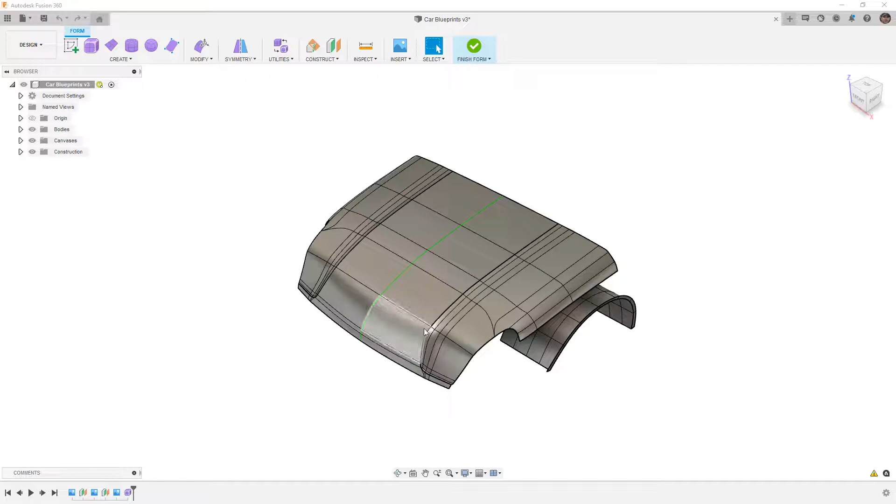In this video, we're going to carry on with what we've done previously, where we added a creased ridgeline as opposed to using two edges close together. We're carrying this over to the point where we now have to flare the fender out, and carry the front edge of the hood over so we can connect to our wheel arches.

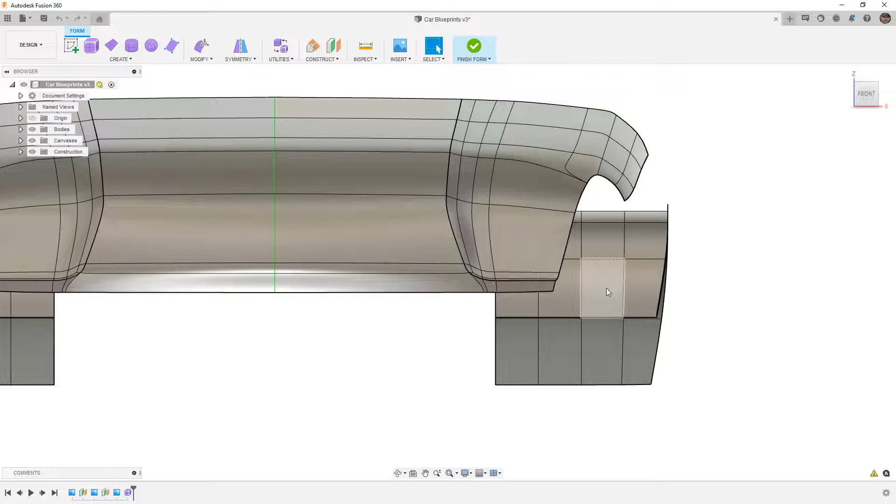There's no right or wrong way to go about this process in terms of which direction to go first. Since in the last video we created our wheel arches and started extruding the top edge of the fender, in this video I'm going to start from the front edge and continue moving that over. If you'll remember, we did identify a few problem areas.

There are things we need to fix, but for right now we're not too worried about these areas. Sometimes we can fix these by selecting an edge, deleting it so it's able to smooth itself out, then coming back and inserting an edge, or using an insert point. For example, going from here to the midpoint of this edge, sometimes that will fix the geometry. We can go back and select insert point, and sometimes we can make triangles or extend those patches out.

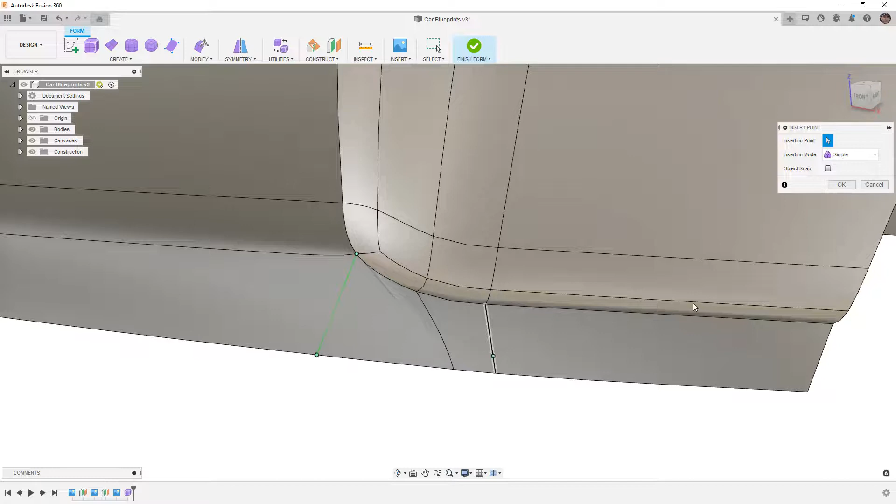But again, this is an area we're going to have to focus on. We know we're going to have to come back and make some changes, so we're not going to spend a lot of time on it right now. Those details can really eat up a lot of time, and it's probably better to continue making bigger strides and then come back to those smaller details.

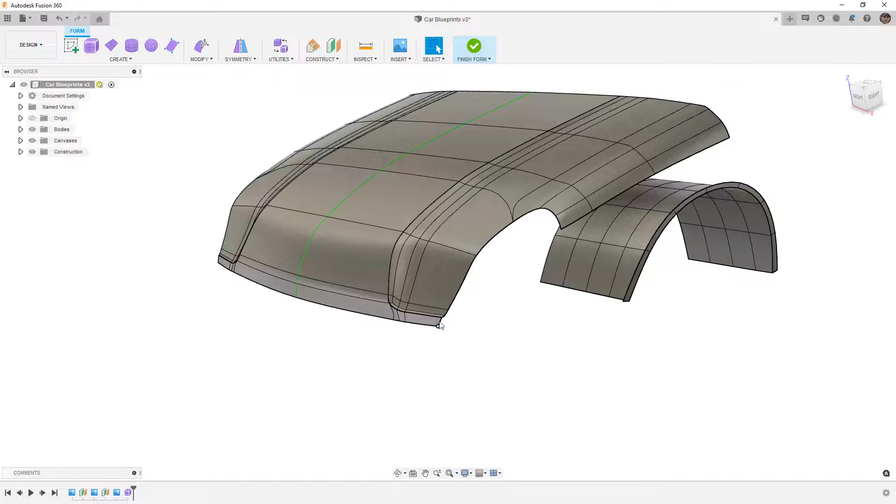So the next thing I'm going to do is carry this fender detail over and connect it to the wheel arch. When we do this, note that we have a creased edge here, and I want to select a couple of edges. I'm going to grab these three edges, doing this from the front view to start.

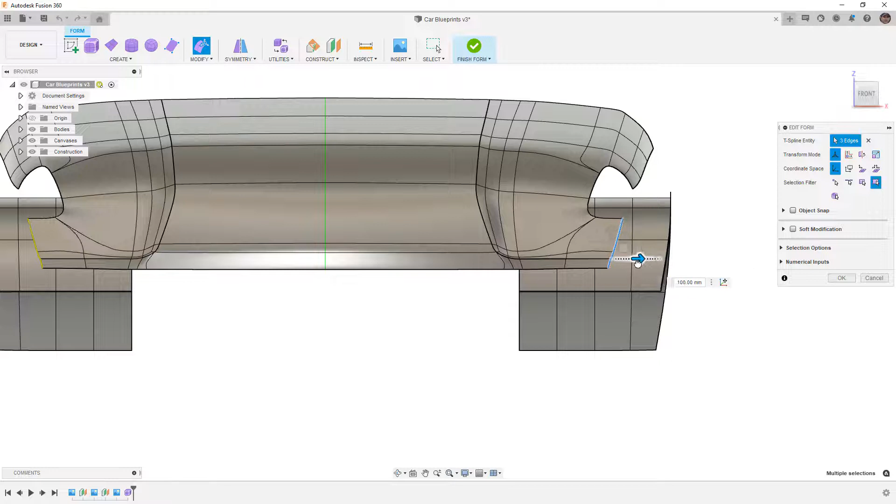We're going to go to Modify, Edit Form, the tool we've been using for pretty much everything. We'll hold down Alt on the keyboard to extrude, and begin pulling this out. Notice that as soon as we do this, we're seeing very different geometry being created. When it extrudes, it really brought this edge quite farther out than we wanted.

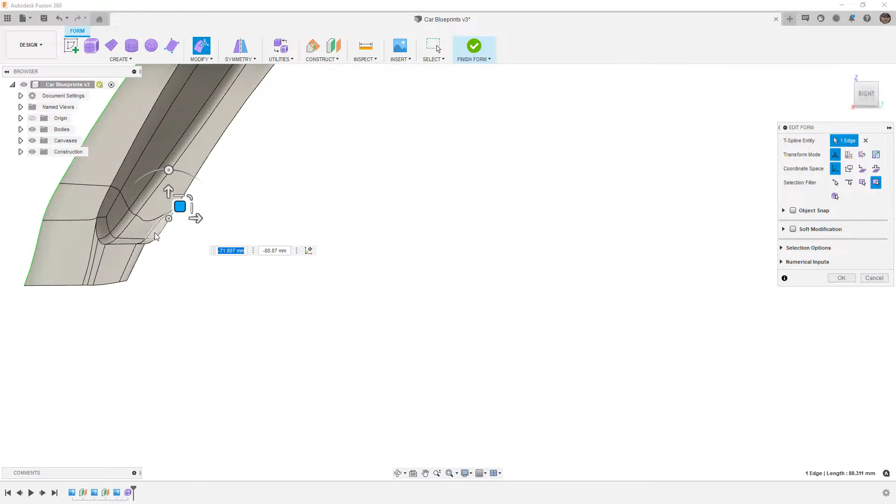So what I'm going to do is reshape this a little bit. I'll grab that face and bring it down, keeping in mind we're going to make some more drastic changes. At this point, let's go to a box display so we have a better idea of what's underneath.

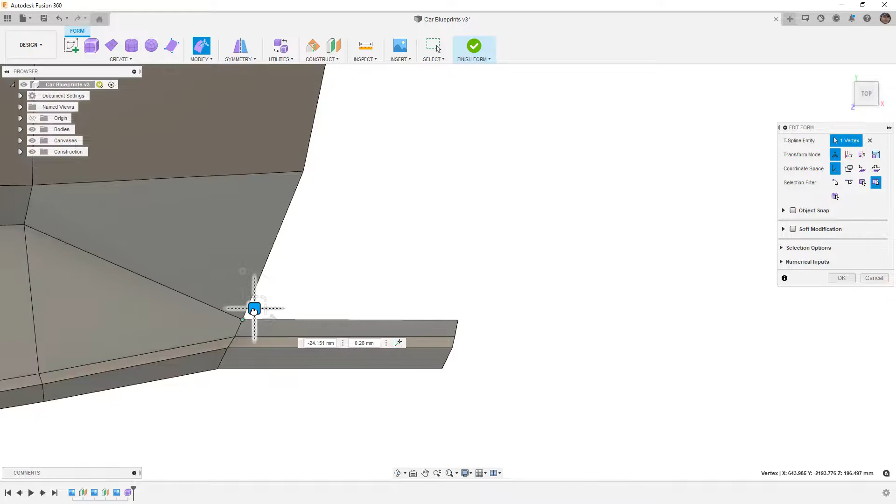Back in the front view, we want to make sure we pull everything and get it roughly in line. We don't want to deal with bad geometry, so everything needs to be nice and even. I'm going to take this edge and pull it back a little bit, and probably take this vertex and pull it back too. Now that we have those lined up, looking at this from the front...

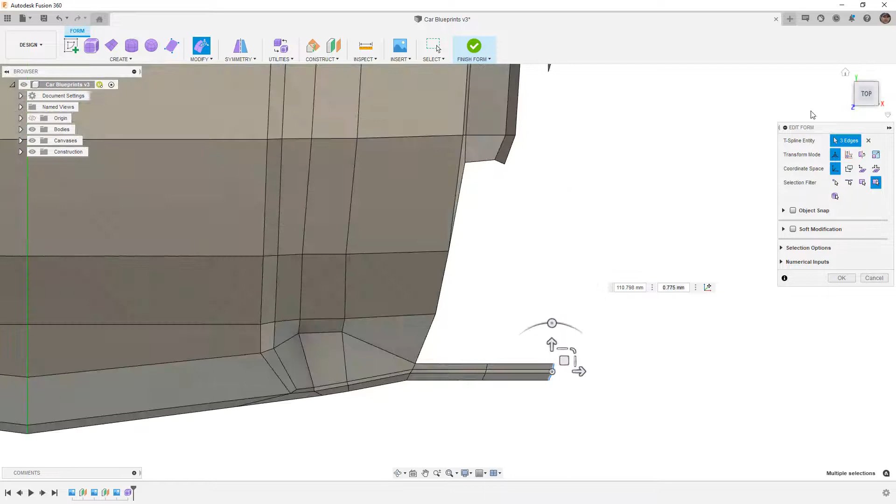This looks pretty good, we're going straight across, and now I want to extrude it again. I'm going to do a box select to grab those edges, hold down Alt, and begin bringing it back. But this time, before deselecting, I want to go to a top view and rotate them, pulling them back. If we go to a smooth display, what we're doing is trying to transition this shape back.

I'm going to box select this, grab these edges, and pull them back a little bit, and maybe rotate them just a little bit more.

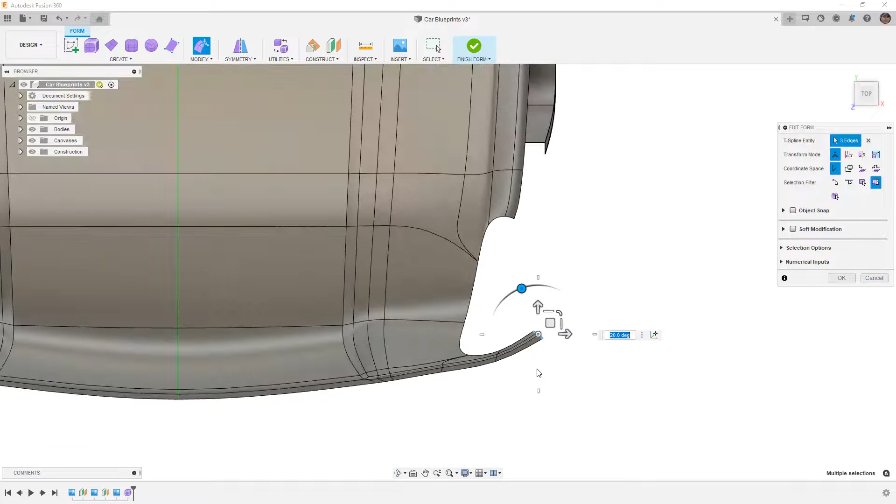We're looking to carry that creased edge around, and again, we can spend a lot of time adjusting the shape, but we are going to have to cut some stuff out for the headlight, so we're not going to spend too much time finalizing it just yet.

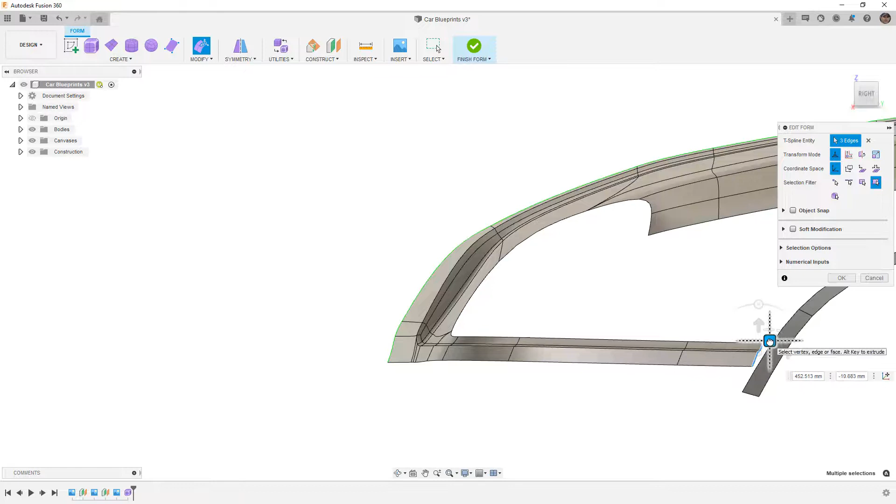But we do want to grab those edges again, this time from the right. Holding down the Alt key, we're going to bring that back. And as we get a little bit closer, I'm going to let go of the Alt key. I'm going to do one final pull to about right there, and then I'm going to left click.

Next, I'm going to grab these edges on the bottom. And again, top left to bottom right, we'll be able to grab just the edges in that box. And I'm going to bring this up a little bit closer.

This transition is going to be tricky because we have a creased edge here. That creased edge is going to be problematic, and we need to decide how we would terminate that into the rest of the geometry.

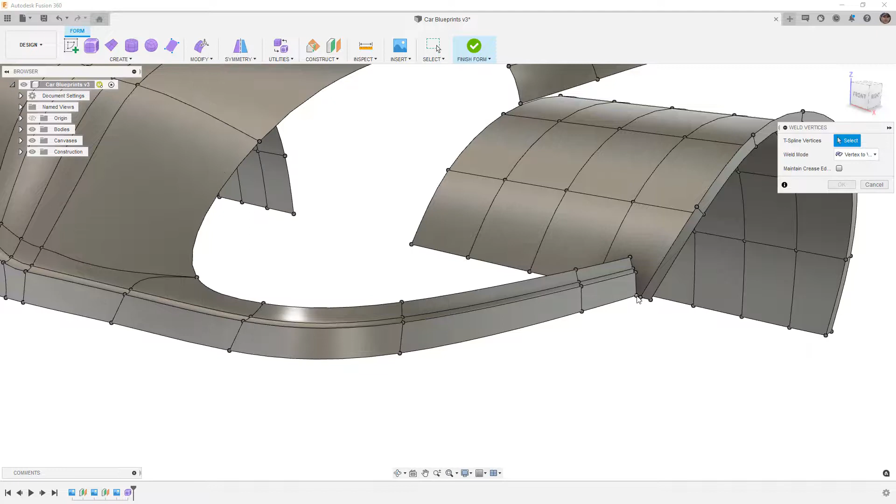So my first attempt here is to go to Modify, and I want to use Weld Vertices. I'm going to weld these two vertices here. As soon as I do that, notice that everything goes into box display. Now, oftentimes when we get a box display like this, it generally means that there's a problem and we can't go back to smooth display. And that's because we've got this open edge here. We've got one vertex and it's been welded to another, but this edge is just open and it doesn't know how to reconcile that in smooth display.

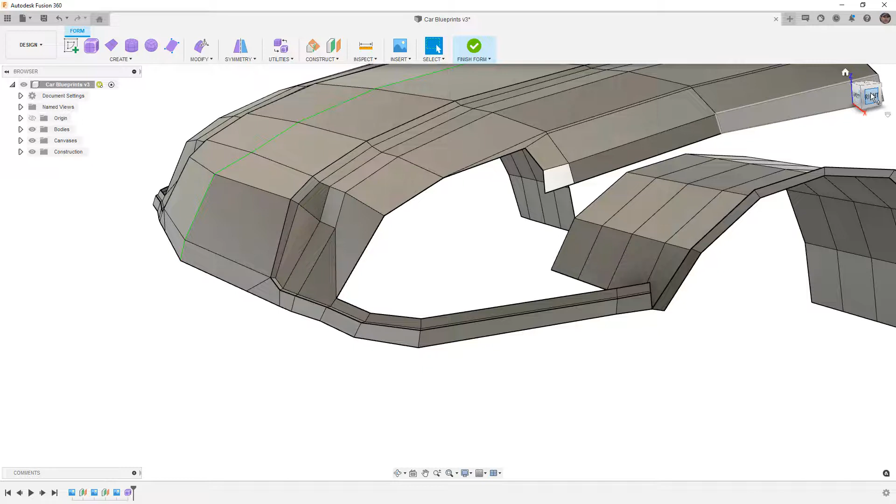So in order for us to really get that to work, we need to transition the shape into the rest of the geometry. In order to do that, I'm going to try a few things. I'm going to begin by selecting these edges, and I'm going to start by pulling them up. Now, by pulling them up, what I'm doing is I'm getting this edge and this edge roughly the same length, and then we're going to see what that transition does when we go back to smooth display.

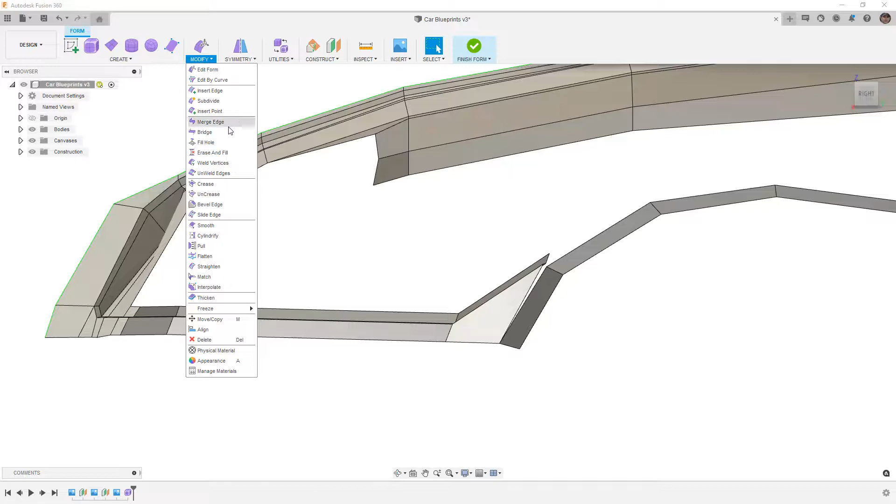So we'll go to Modify. This time we'll take a look at merging the edge. So I'm going to take this as my first edge, and this is my second edge, and I'm going to say OK and put those together. Now you can see we're back in smooth display. It's showing that crease, that transition going up. And you can see here that this section, which was basically the top level of that, is now transitioning.

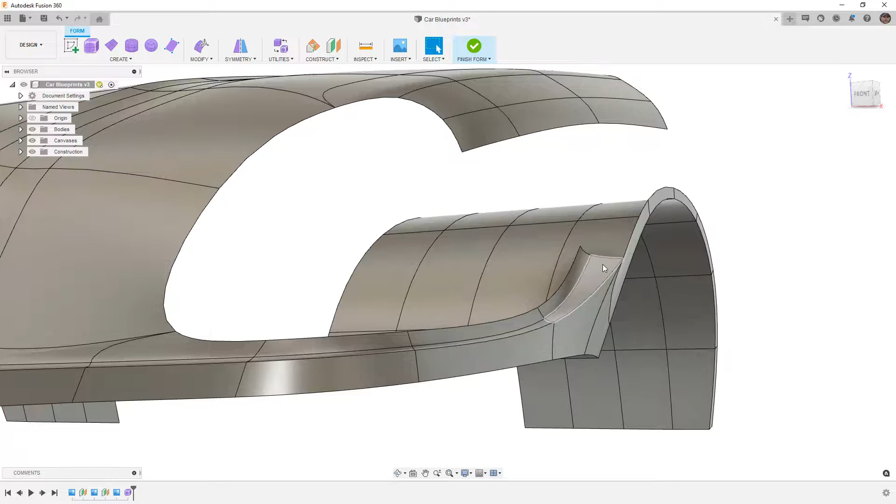I'm going to go back to a box display, and I want to take this edge from a front view, and I actually want to bring it up and over. The reason I want to bring it up and over is because I'm taking this crease up and I want it to blend and sort of fade away. So I want to bring this up and get it a little bit closer, go back to a smooth display, and let's just see what it looks like.

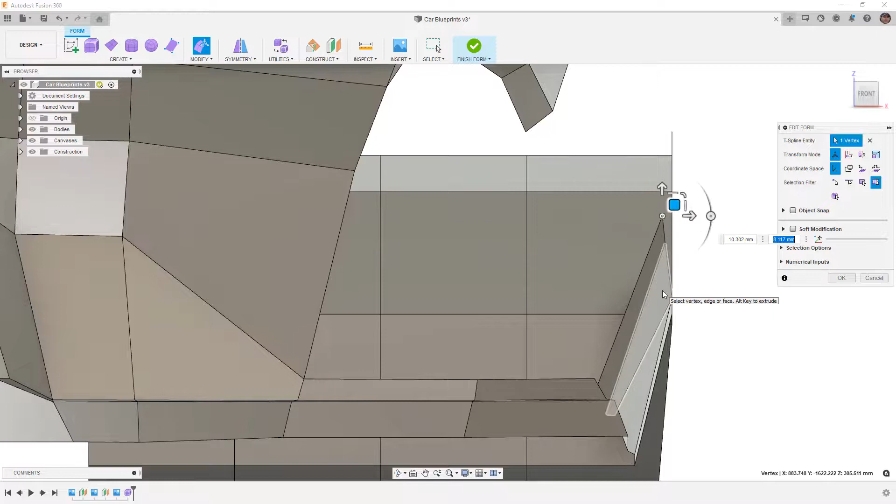So that looks pretty good. And if I use Control and 4 on the keyboard, don't pay too much attention to this crease or transition here because we don't have any other geometry. But that transition, how it goes up the fender, actually looks pretty good.

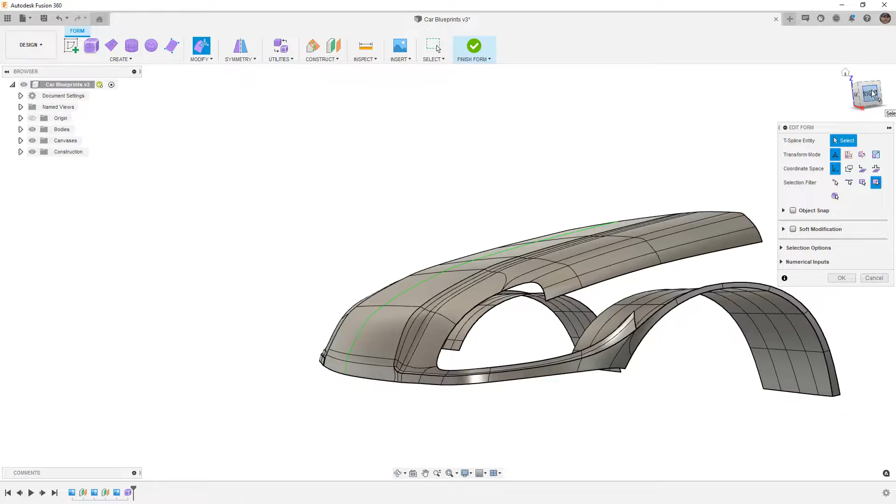Again, there's a lot of detail work that we can do. We need to determine in the real car how that transition actually works. And in reality, what happens is that transition happens a lot lower. So what that means is we're going to have to make some adjustments to the shape of the fender.

And the reason I did that box select for that is because we actually have the entire line of vertices behind it. And because we're dealing with symmetry, box selecting here would grab the ones on the other side of the car, but that's not really a problem because they're going to move anyways.

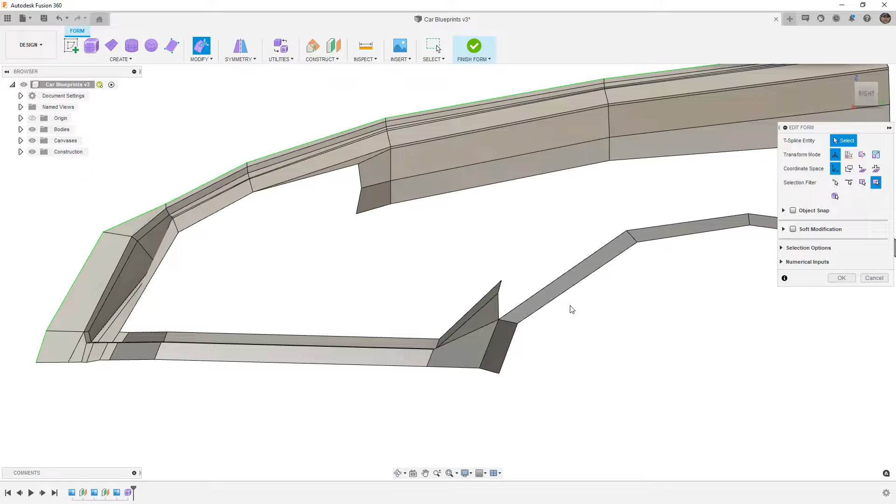But moving that down means that we likely need to add another cut or another edge in here. So we're going to go to Modify, Insert Point. I'm going to go from the back mid to the front, and then I'm going to come up to this edge here and say OK.

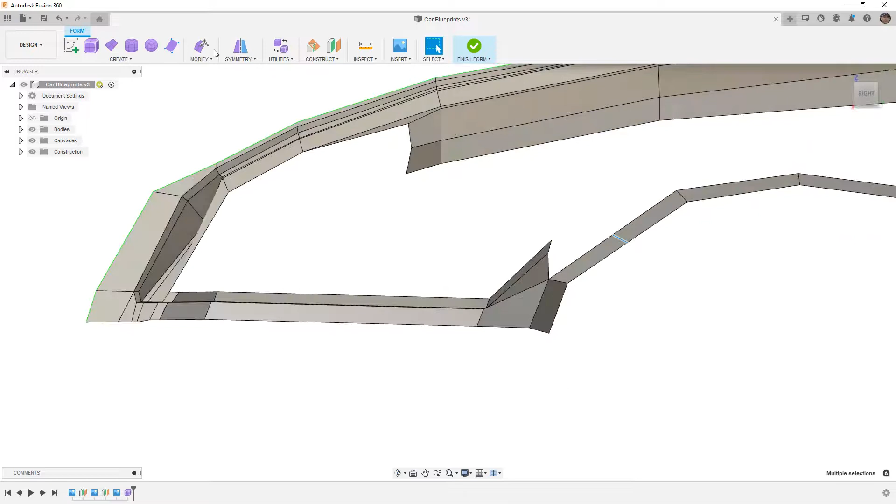And then I'm going to box select that, go to my right view. I'm going to go Modify, Edit Form, and I'm just going to add a little bit of an arc there. So again, smooth transition, and you can see how everything sort of works out. So now we have a little bit more freedom to move this around.

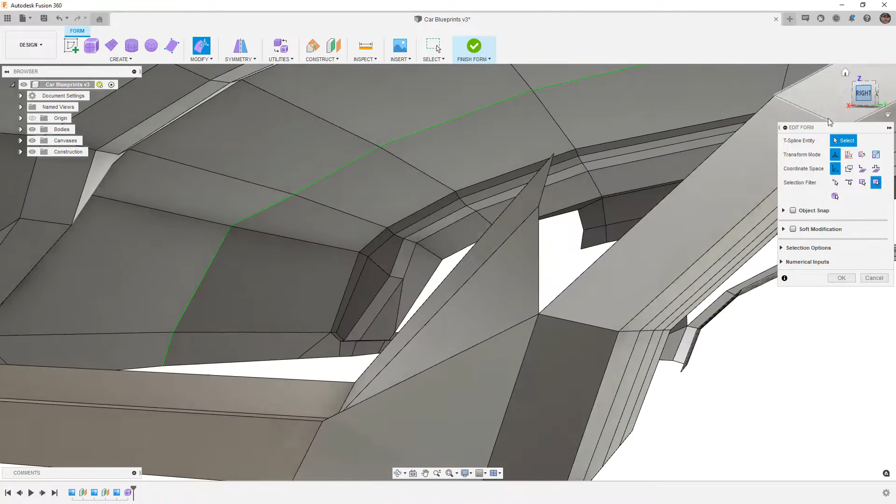We can move that entire edge down if we want to. And again, we need to be mindful of what we're selecting. So box select, pull this down a little bit, and then let's take a look at these transitions.

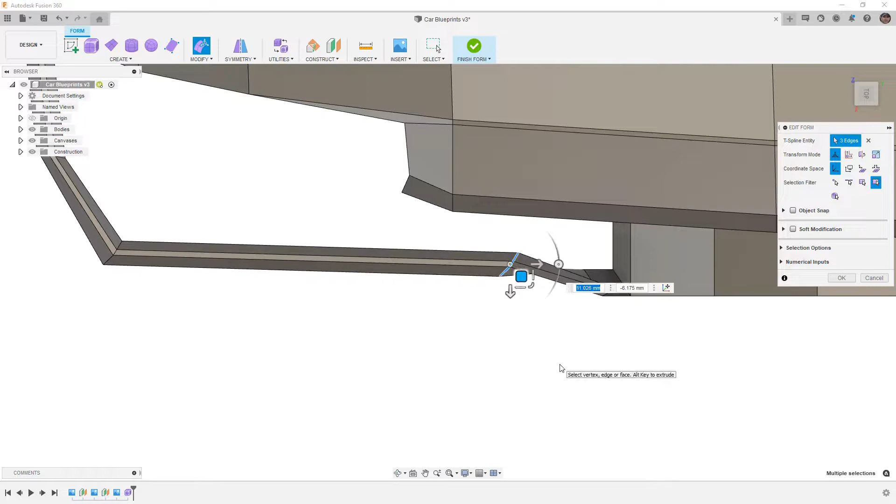Everything here looks okay. Keep in mind that when you have these sort of transitions, they do tend to flare out. So having that flare out is okay, but we might want to move this out a little bit. Check it out in a smooth display. You might want to add another section of edges in here if we want it to go straight back and then flare out. But it's looking okay.

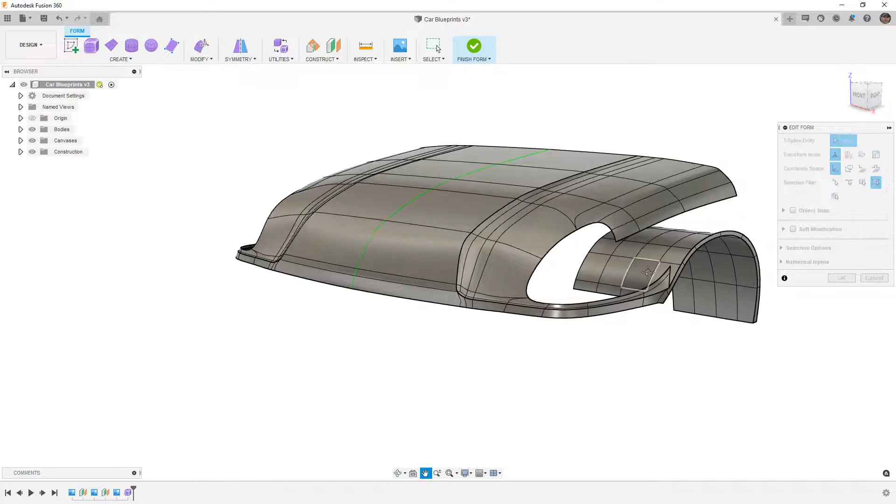We could do more with this, but we could also kind of leave it as is until we get more detail. It's always important to remember that as soon as we add more detail, as we begin adding more edges and more features, it's going to change some of this underlying geometry. So spending a lot of time now getting all of these tiny little details perfect is going to be a waste of effort. It's really something that you need to get the shape close, and then we can begin subdividing it and adding more edges and getting the shape a lot closer.

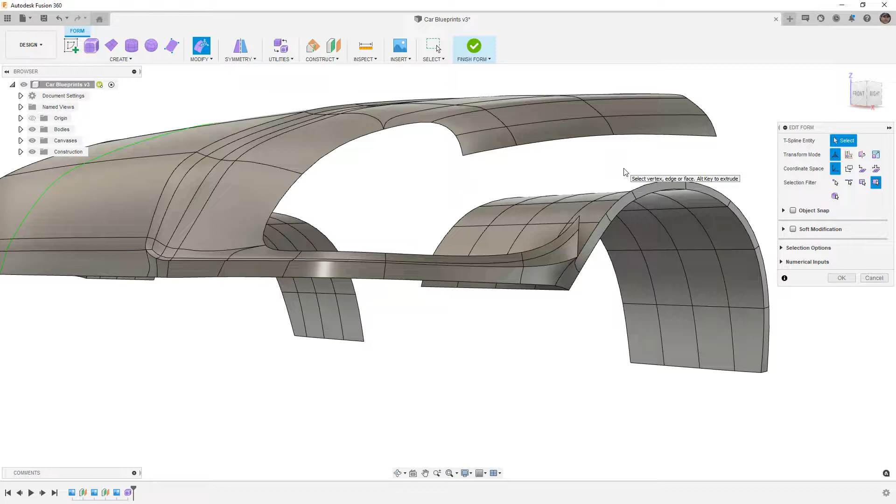When we take a look at the car, these transitions are usually going to be the hardest. They're going to be very difficult because we're transitioning from a creased edge and we're blending it into something smooth, and those creases tend to disappear. In reality, we would love to say this is 100% crease, this is 0%, and just have it fade away on that edge. And that's unfortunately not possible using these tools.

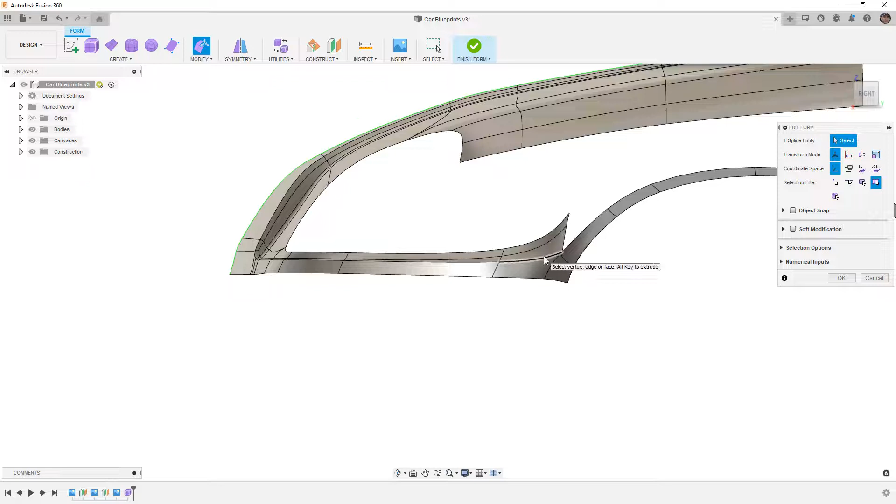We have to really force the issue manually. I'm going to go back to a box display, and I'm going to make some adjustments here. I want to pull this back a little bit, and I have to decide what to do with this.

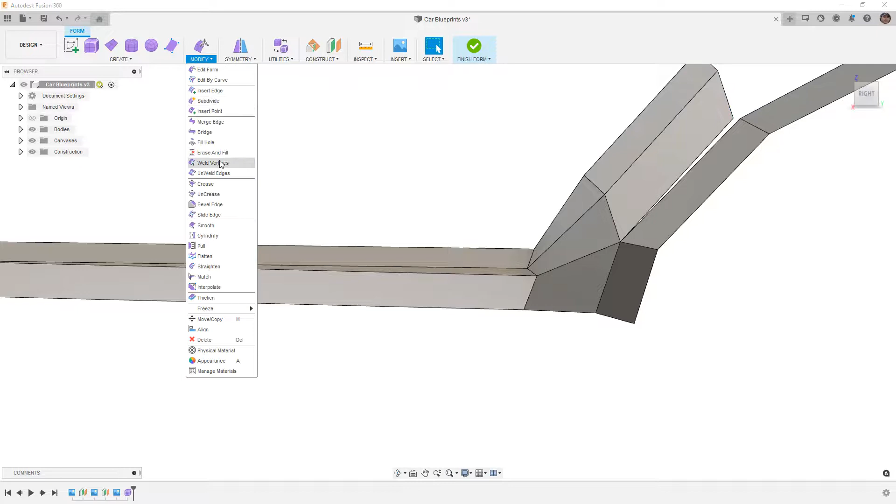Do I want to continue to sort of make extrusions off of this edge and blend them in, or do I want to try to merge some edges? I think in this case, I'm going to select these edges, use Alt, and extrude them out. Then I'm going to say OK, go to Modify, Weld Vertices, and bring these two together.

Then I'm going to take a look at it in Smooth Display. So in Smooth Display, that obviously doesn't look like the real car, that hard edge transitioning up. But again, until we add more geometry, we don't really know what's going to happen.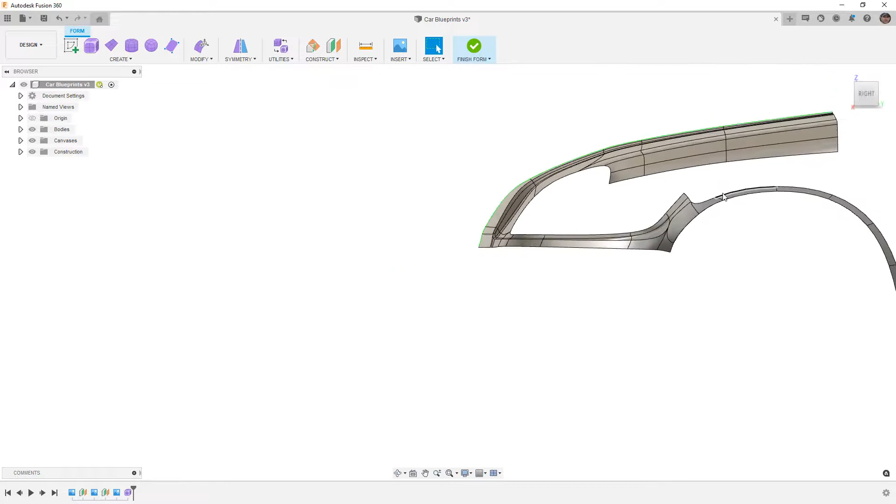And this is the point on the car where we have that sort of boxed fender flare. So if we bring back our canvases and we bring back our side view, this is where we need to decide how the geometry is going to take shape. So I'm going to start at the back edge here.

I'm going to begin at these two faces, or these two edges, I should say. And I'm going to bring them back, extruding them using Alt, and then I'm going to modify their position. This is something that we can do in Smooth Display or we can do in Box Display. It really depends on your workflow.

Then I'm going to take these two edges at the top and extrude them up. And once again, I'm going to grab a vertex, pull that up, grab this one, pull it up. Now we sort of have created this area here.

Now, if we want to continue this, we can continue extruding these out, and then we need to begin to decide, well, are we making triangular patches anywhere, or are we going to pull these two together? And what is that shape really going to look like?

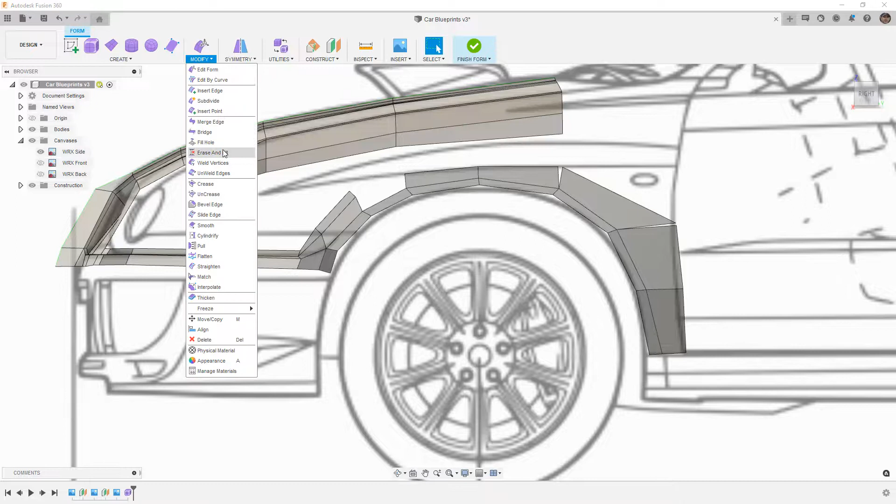Remember, at this point, we want to be careful not to add too much detail. So we're going to weld these vertices together. I'm going to select these two, weld them together, and select these two and weld them together. Then I'm going to take a look at the Smooth Display.

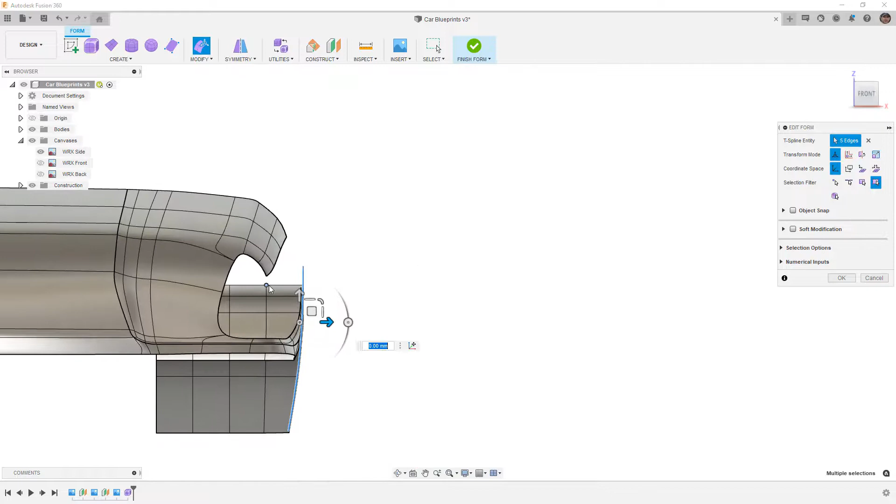So that looks okay, pretty smooth transition. We can pull it in if we want some curvature, using Modify. I'm going to go to a front view so I can see the curvature, and pull that in slightly. So you can see we've got a slight rounding here.

That's typically what you'd see coming away from a fender opening. Next, we can begin to connect - you'll notice we've got two edges here and one, and we want to try to keep these four-sided patches whenever possible. In this case, I'm going to use my bridge tool, going from this edge to this edge. I'm going to say one face because that's how many we have in between.

I can show a preview if I want - it's not really going to do much for me. But what it's done is created that extrude for us going between those two edges. So now if we go back to Smooth Display, we can see what we're creating, what's starting to happen here.

But when we view it from the right, this is where that flare is, that box flare. So I think this is going to end up being a triangle. I don't know that I can make it a four-sided patch. We can certainly try, but we need to get this flared out section.

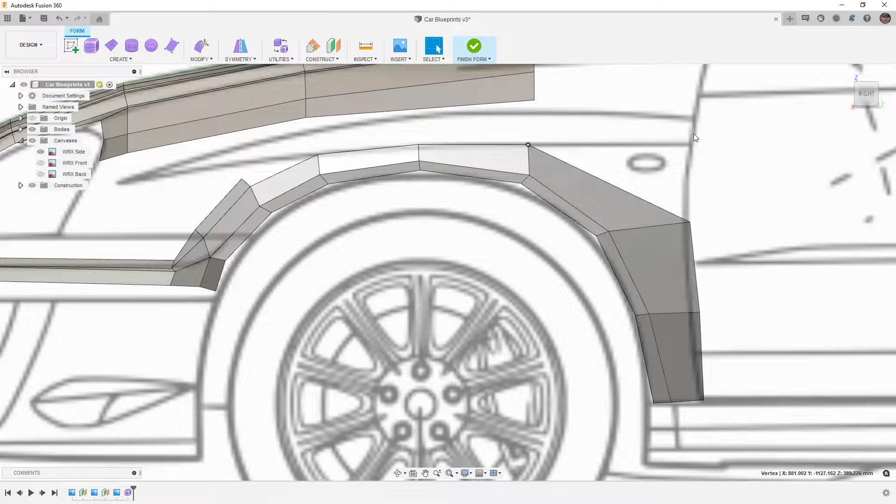In order to do that, once again I'm going to extrude. I'm going to hold down the Alt key, bring this up, and say OK. And then I want to continue to use Edit Form, and bring this down, potentially bring this entire edge down, so that it gives me a little more room to have that four-sided patch.

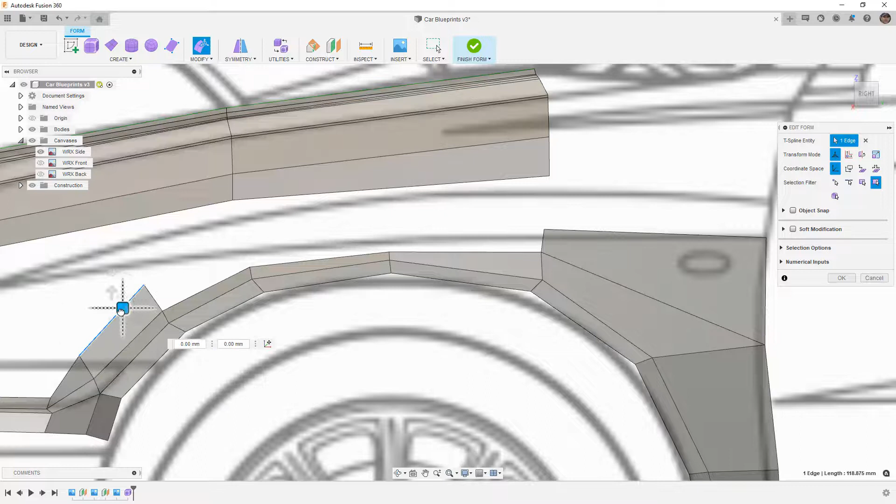Again, keeping everything consistent, moving everything in plane, being careful that we don't move things in 3 dimensions at once. We're only trying to work in either one direction along an axis or in a plane. So I'm going to try to match that, and then continue with these two, making the selection here.

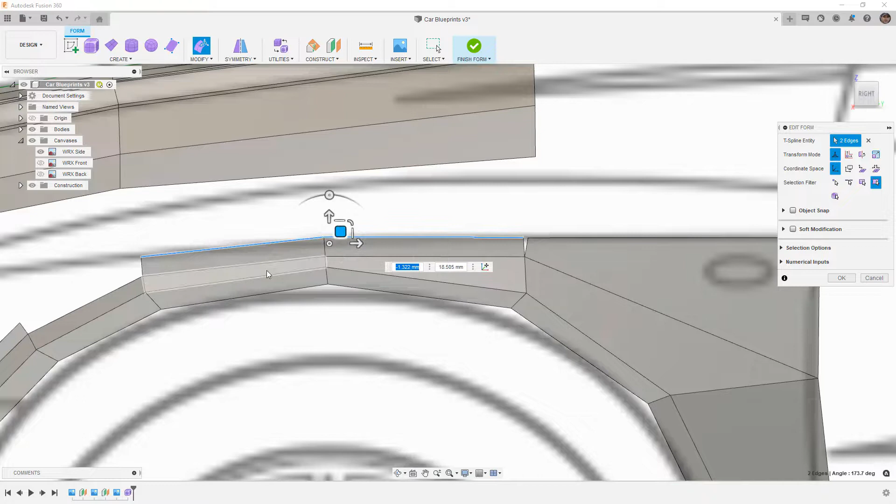Hold down Alt and extrude those up, pulling them slightly away from here because I want to merge it, and I'll say OK here. So let's weld these vertices and say OK. So now we're beginning to build that fender flare. If we take a look at a Smooth Display, it doesn't really look like much yet.

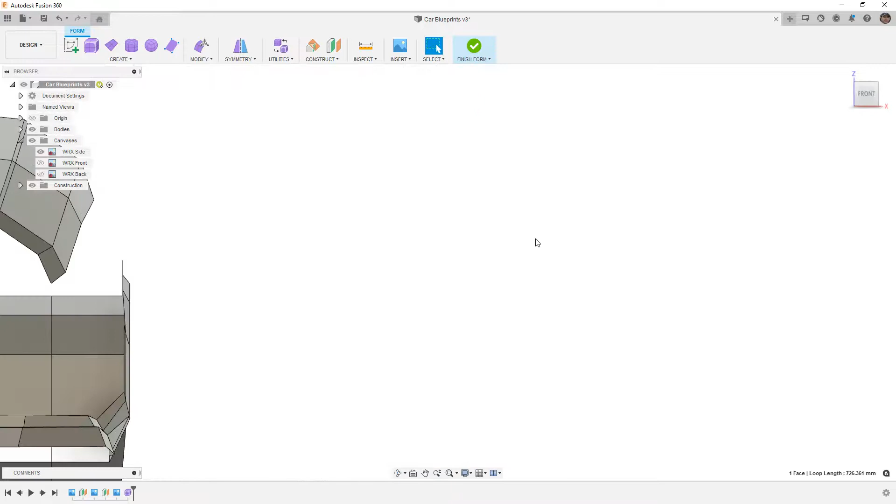But what we're doing is starting to define that upper edge of the flare. So when we look at this from the front and bring back our front image, we need to start coming in and then up and connect to this. Now we can do this in a number of different ways, but continuing to extrude using that Modify Edit Form is probably going to be the best option.

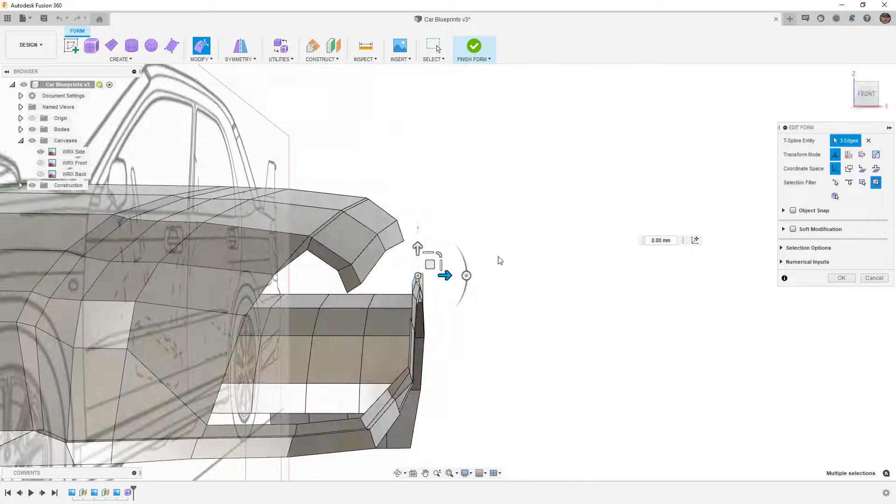Once again, we're going to come back later and add more detail. So I'm going to use Alt on the keyboard and extrude this up. If you want to show the front, you certainly can. Then I'm going to hold down Alt again and extrude one more time coming up, and then we'll take a look at this from the right side.

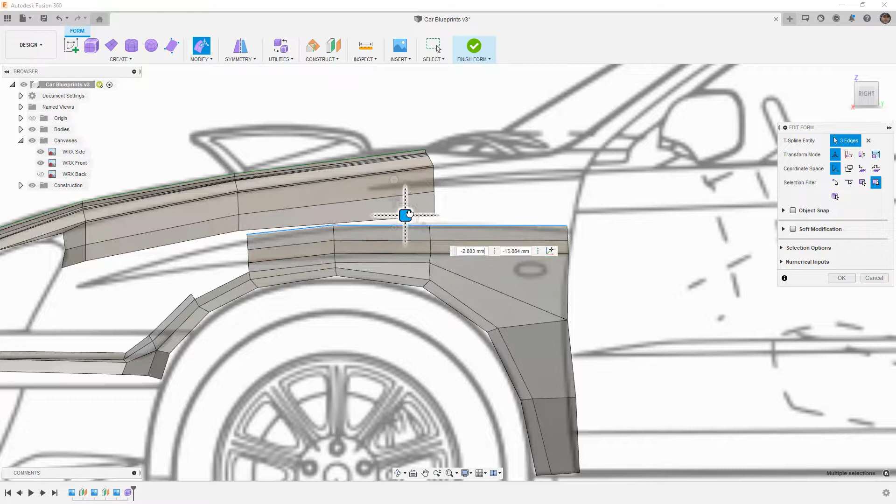So this is the beginning of that flare. If I want to, I can bring this edge down a little bit, and bring this edge down a little bit. Noting that as we're looking at this, the fender of the car, like the hood, is not coming back nearly far enough - that's because we never really carried it back. We don't have a top view, but we never really carried this geometry back.

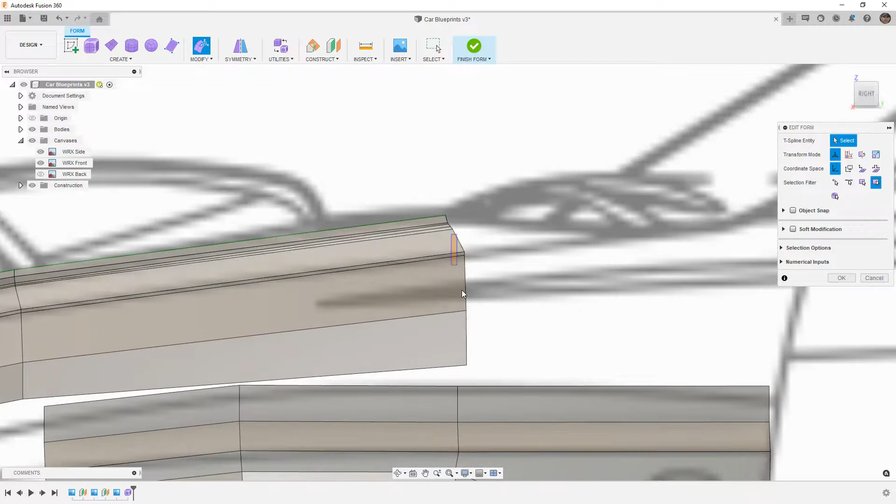So in order to carry that back, I am going to make some selections. I'm going to begin by just selecting these, and pull these back. Then I want to view this from the top, and bring some of these other edges back as well - might go down to the vertex level. What we're really looking to do here is make a smooth transition.

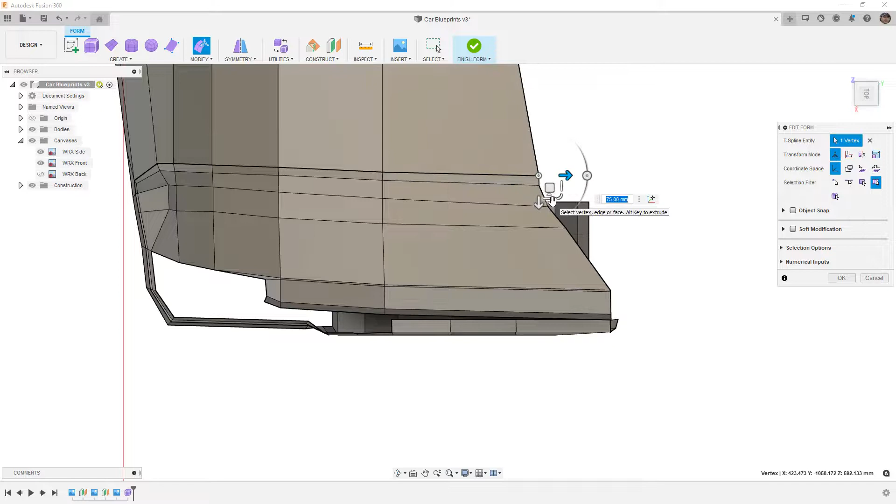So if we go back to our smooth display, you can see that the transition looks a little bit better than box display, but we still want to keep these consistent. That is always going to be the key - you don't want to have any wild changes in curvature that happen in the middle of an edge. You want to keep them consistent so it is nice and smooth.

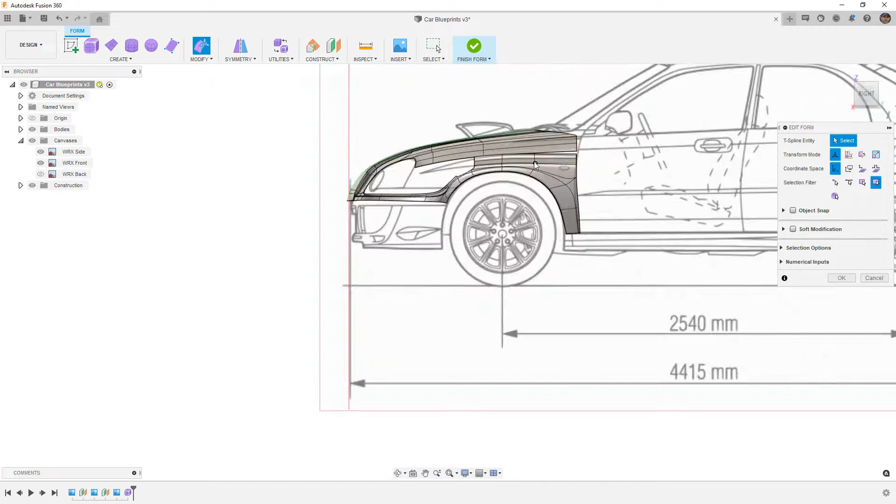So now when we view this from the side, now we're a little bit closer to that back edge. We don't have the same number of divisions, which means we need to make some adjustments. I'm going to take this and actually pull it forward a little bit and try to get it closer to this edge.

And then I'm going to divide up the rest of this body by adding some edges in there. While we can connect them to an open edge and add a point to break that edge up, the geometry generally doesn't work very well. So I'm going to use insert edge in this case.

I'm going to double click this edge and bring it over to about there. And then I'm going to repeat the process using this one, bringing it over to about here.

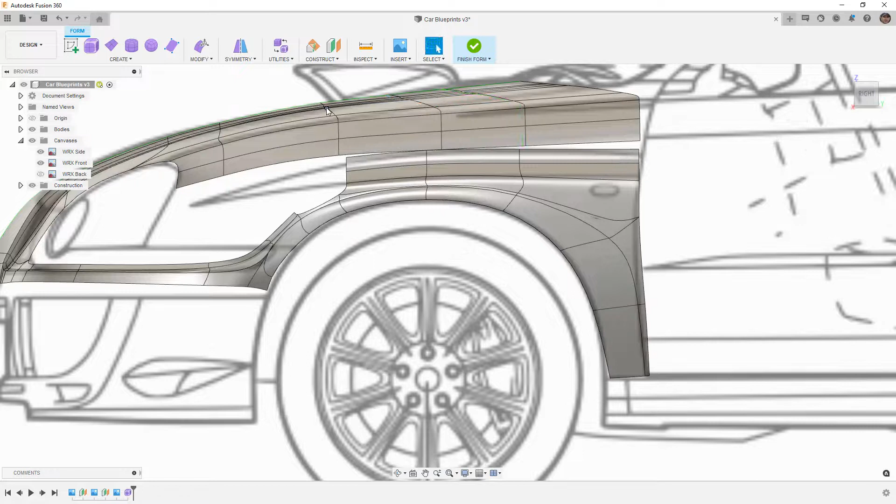When we do that, we have to be careful because we just introduced some curvature that was unintended. So we need to go back and fix that, at least at this point, and we'll say okay. Now we can come back and do merge edge.

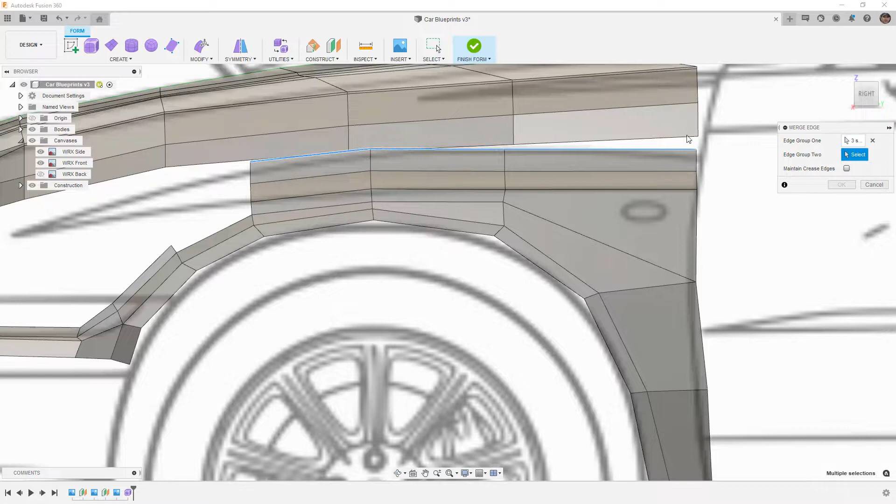I'm going to say 1, 2, and 3 edges on one side, and then this side here I'm going to do 1, 2, and this third one, and I'm going to say okay. So now what we've done is we've merged those edges.

But if we go to our smooth display and hide our blueprints, that is not the fender flare that we are expecting to see. We're expecting to see harder transitions. If we look at the front, we are hoping that this is actually a crease.

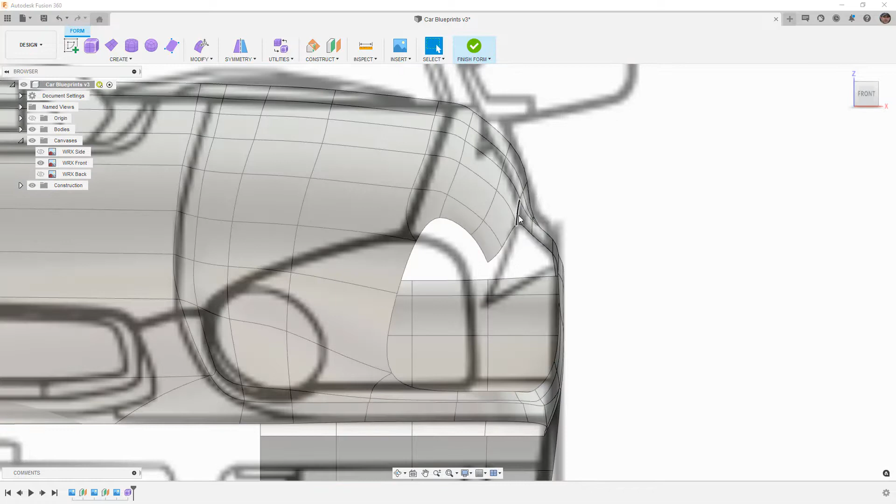So I'm going to select it and crease it. I'm also going to crease this edge here. Now, this is temporary because we are not going to be artificially doing the creases forever.

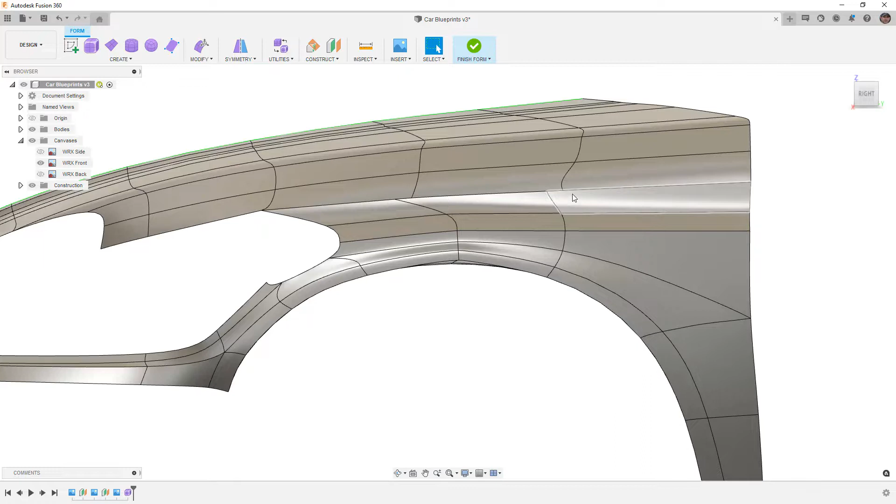We're just using it during the design phase. And as we're doing this, one thing that is apparent is that merge edge did not actually push those vertices together. So we're going to use weld vertices and make sure that we position them properly. I want these transitions to be in the right position as they move.

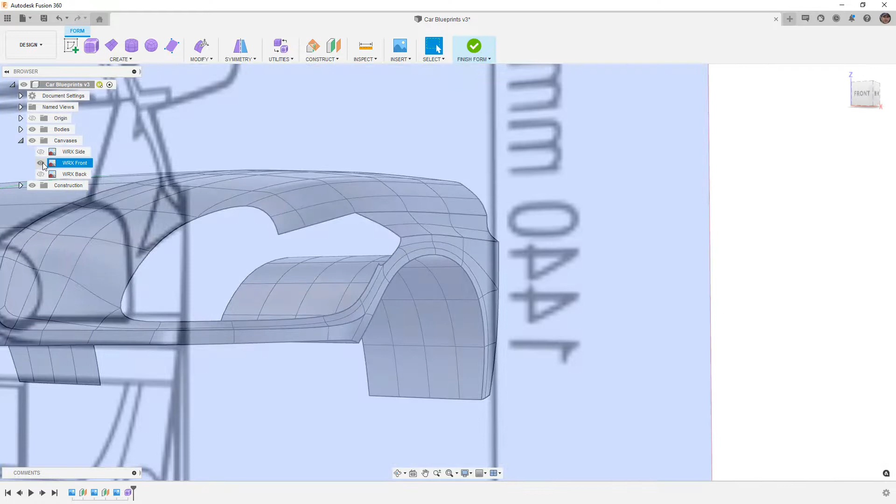So now we're getting a little bit closer to what that fender flare transition would look like. We have more work that we need to do in this area. Obviously, we haven't continued the geometry up here, but we do want to maybe move this edge in a bit. So using modify edit form, we'll bring that in, and then maybe we'll pull some of this other geometry out.

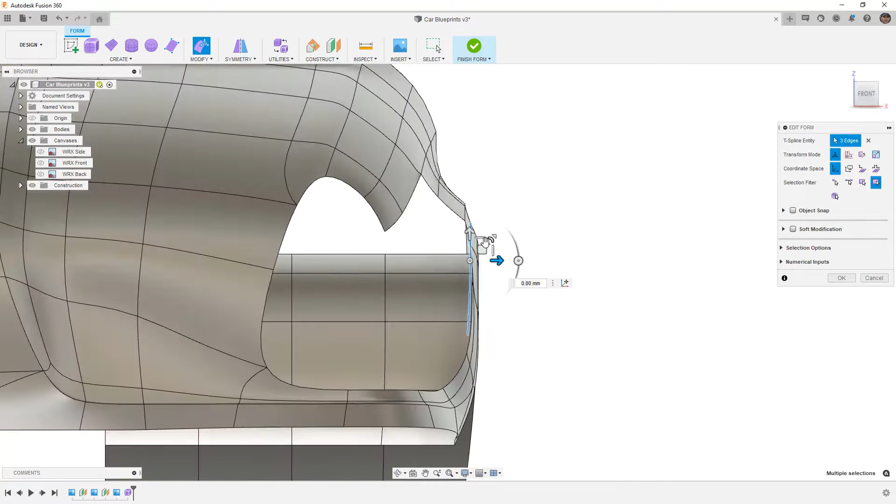So I'm going to go back to a front view, and on the car, the transition is more rounded, so it actually comes up and into that crease a little bit. Let's go ahead and use Control-3 on the keyboard, and now you can see we've got that crease coming down and around, and it sort of fades up into the fender. And then we've got the startings of the fender flare.

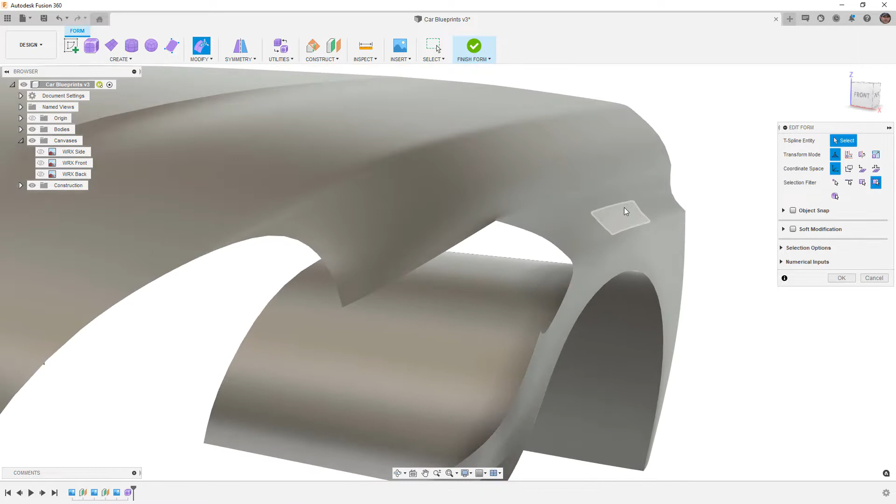And again, we're going to go back and fix these creases in the corner that happen because we haven't finished the geometry. And we're going to add more to the transitions. We'll likely go back and add a bevel, which will give us that true curvature continuous transition. But for right now, we're going to use those creases to our advantage.

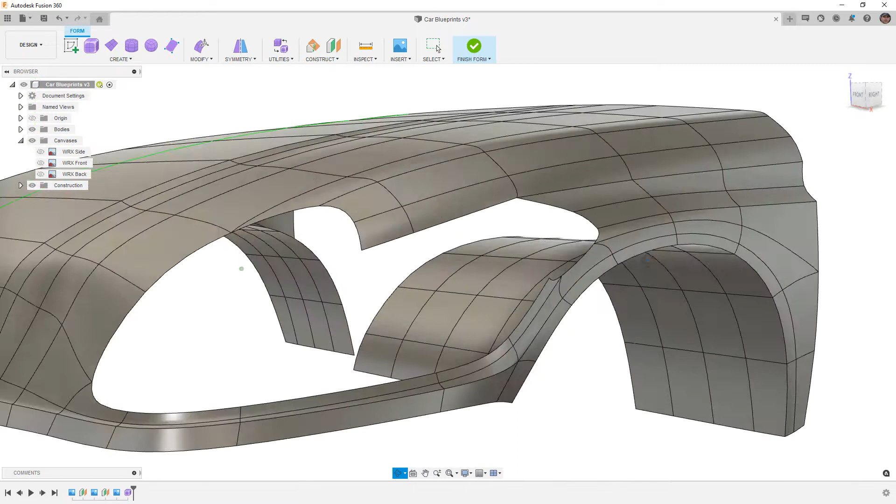So this is a pretty good place for us to get to. Still a lot to do. Hopefully you are still sticking with it, because if you want to produce models with the form tools in Fusion 360, you are going to have to work through this process on your own. You're going to have to play around, experiment, and be okay with going back to the drawing board at some time.

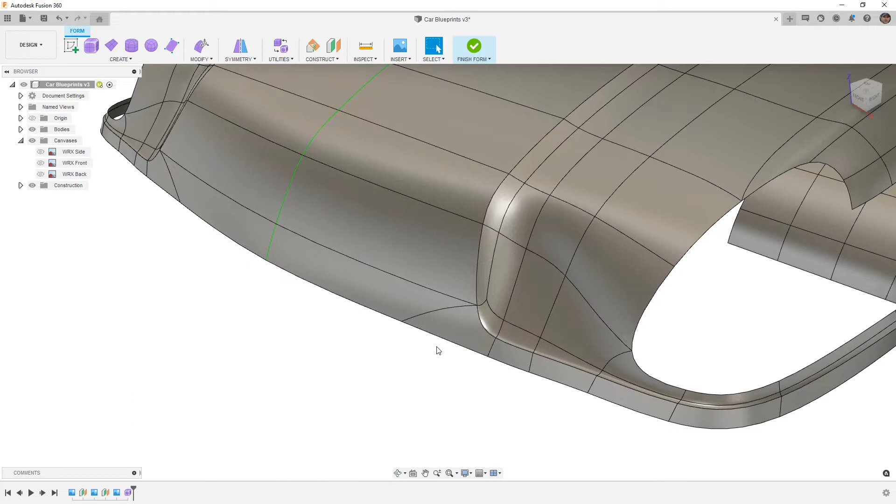Like, we've already talked about how the front is not ideal. We know that we're going to have to fix some bad geometry in this area. It's something that we're going to have to come back to. There's a little ripple here that we need to take care of. And there are just things that we generally need to fix.

But that's okay because we're looking at the bigger picture. We're looking at the bigger shape, and we're going to deal with the big stuff first, and come back and worry about those details later.

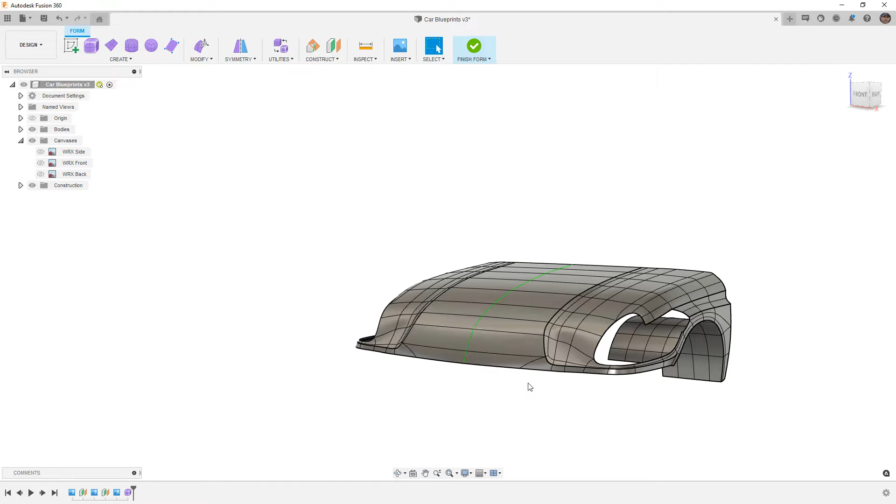At this point, make sure that you do save your file because we've done a lot of work. We don't want to lose anything. And this way we can always come back to the previous version or the previous state.